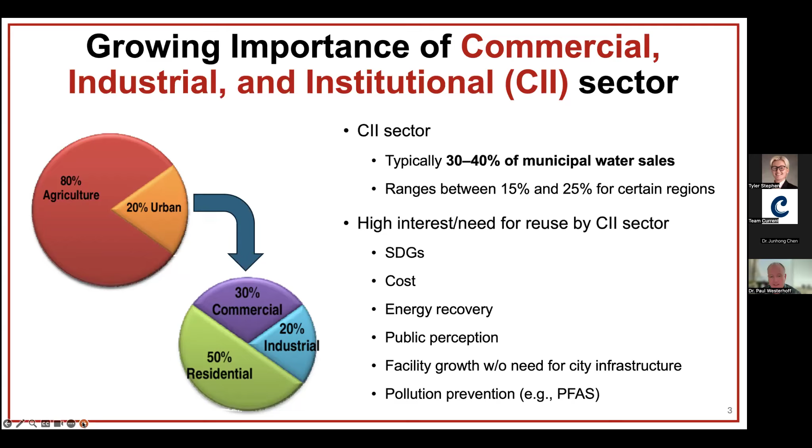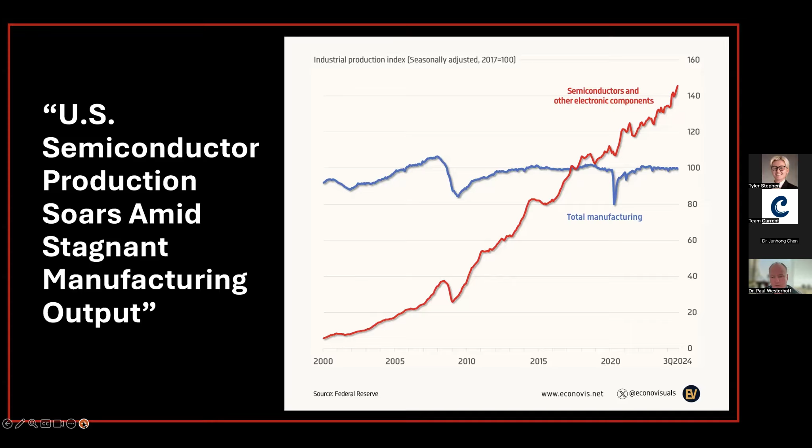Fabs use a lot of water, in part because they need a lot of water to clean the wafers. A typical fab can use tens of thousands of home equivalents. There are lots of small fabs that might use 100,000 gallons a day, but large fabs might use 5 to 10 million gallons of water a day.

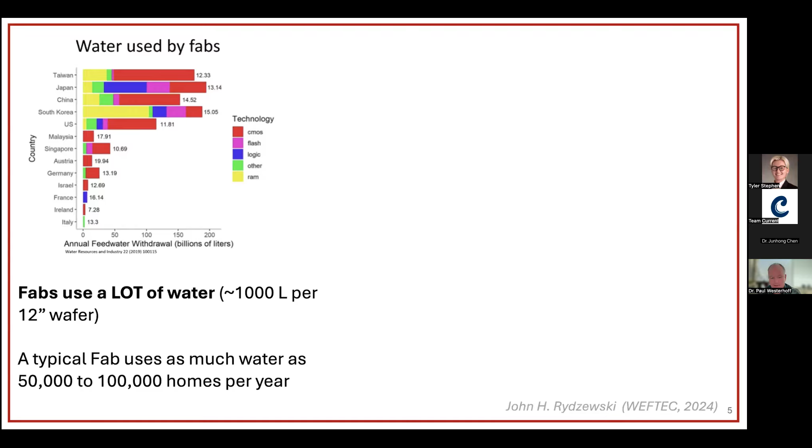Some fabs need dry air, otherwise they have to dehumidify air. There's taxes, energy, power costs, lots of reasons to site them, as well as an ecosystem of companies, because a fab by itself isn't going to work. They need this entire supply chain around them.

So fabs use a lot of water, and there's a new one growing here in Arizona. TSMC moved here a few years ago. They announced $100 billion in additional investments. They have at least one fab already operational, building 2 and 3, with plans to build many more. Around them then builds this ecosystem of supply chain - they need to build and buy silicon wafers, make the chips, and then package these chips onto the wafers.

And you can see they picked part of Arizona, North Phoenix, that has a lot of desert around it, a lot of growth. There's not a lot of trees, there's not a lot of rivers, right? So as a consequence, you can find newspaper articles about water-guzzling chip makers in Arizona. But even in a place you don't think of as drought-prone, like Taiwan, over the last few years they've had water issues associated with the amount of water that's available.

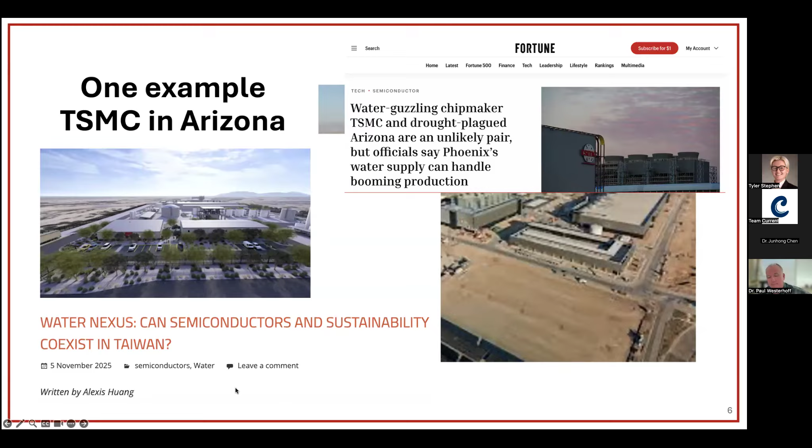So I think this is where we come in and think about how to reclaim and reuse as much of the wastewater in fabs as possible. This is how these high-tech industries of the future are and will grow in areas of water stress. And again, for other reasons, not just thinking about water-stressed areas, but to reduce energy and infrastructure, and to meet their sustainability goals. This is going to be a trend that moves forward, I think, globally.

So hopefully that's a little motivation for why focus on industrial wastewater, why focus on semiconductor manufacturing. Now let's go a little bit more into fabs.

We think about semiconductor fabrication as like making the chip, right? But they make the chip, and then they have to put it on silicon wafers. All those things come from upstream impacts of mining and refining that use water. I'm going to talk about this manufacturing and packaging part. But of course, the chips are used in places like data centers that make us happy with ChatGPT and other things, but these data centers also use water downstream. So I'm really focusing in on this water component in the manufacturing and packaging sectors.

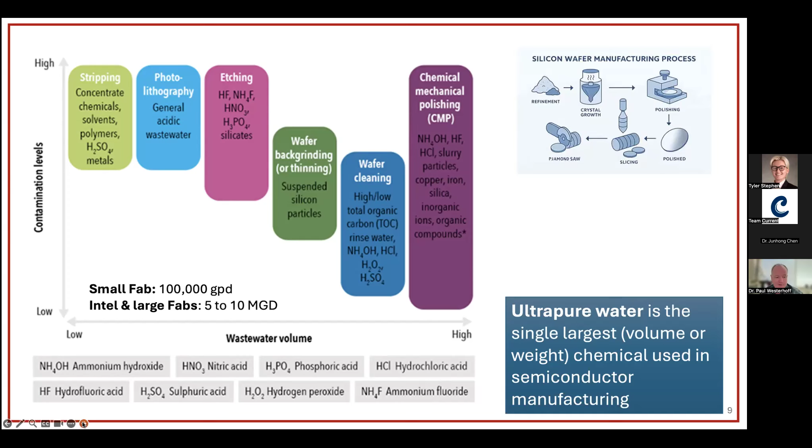But what's missing on this bottom axis is ultra pure water. There's more ultra pure water used, and I like to say it's the single largest volume chemical in manufacturing, especially in semiconductor manufacturing. Instead, on these graphs, all they say is it's only listed in terms of wastewater, right? So I'd argue it's important - it generates a lot of wastewater. The question is, how can we take that wastewater and make it back into clean water to be used in these processes?

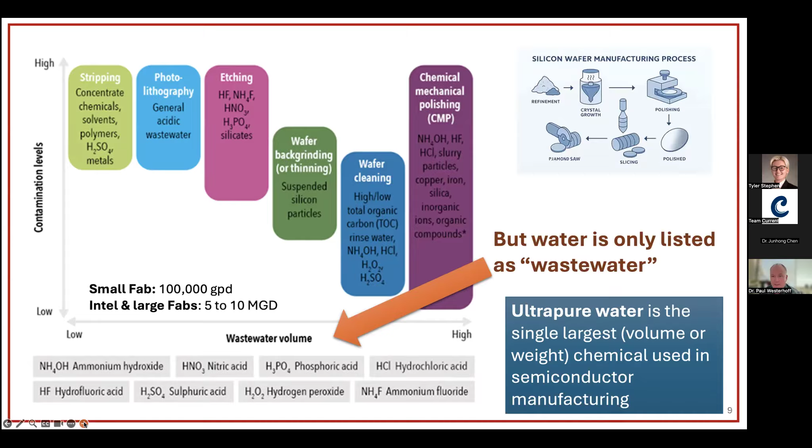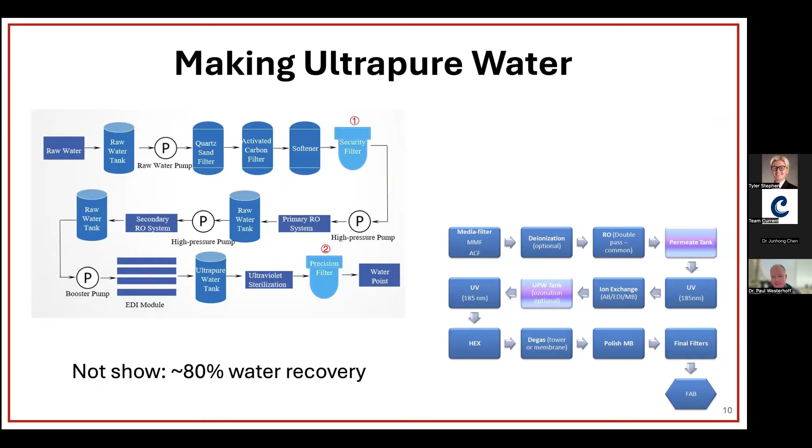So what do they do today? Ultra pure water is made from city tap water for the most part - the raw water is tap water. And you can look at either one of these little flow diagrams. They're pretty similar, I put them both up there because there's some slight differences, but pretty much they remove particles, they remove organics with activated carbon, they soften things, they do reverse osmosis, a second reverse osmosis, then they do electrodeionization, UV sterilization, and more filters.

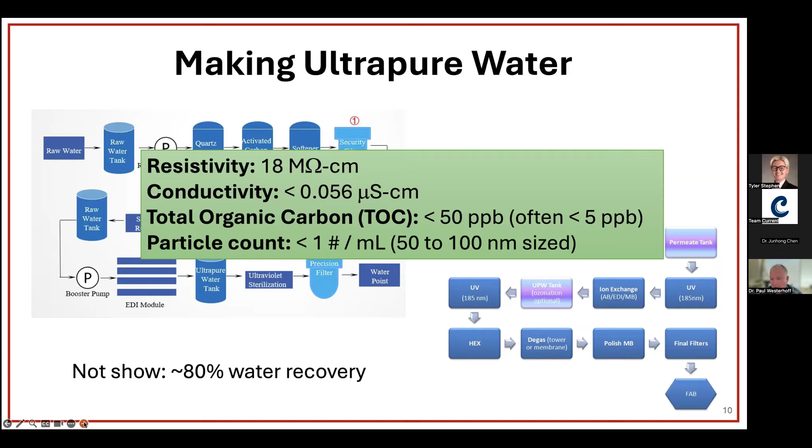And so they really need to make some of the cleanest water on Earth in terms of ionic content. Typically the total organic carbon needs to be below 5 ppb, with incredibly low particle counts - less than 1 per mil in this 50 to 100 nanometer size range. As a consequence of this, the water recovery through this process is at best 80%. So if they can reduce their reliance upon tap water, they can really have an added benefit here in terms of water savings potential.

But there was this incident, pretty well known in the semiconductor industry, from 25 years ago in the Northwest United States. This is published by Intel. It's a sketchy graph, but it's data - on the y-axis is total organic carbon, or urea. So they measured urea here, and again their goal was about 5 ppb.

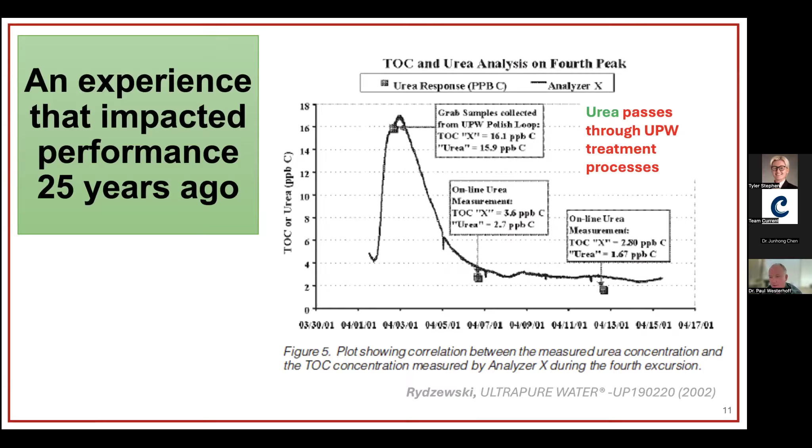But you notice this spike in April of 2001 - it goes up and takes time to come down. That increased spike correlated with urea, and they did a lot of work. It turned out the urea was from a stormwater event and runoff from an agricultural field, where they apply urea as one source of nitrogen. So this has really stuck in their minds - there are a few things that can make it through the ultra pure water system, that's the key takeaway here. And the problem is a little broader than just urea, but really any low molecular weight neutral molecule can pass through ultra pure water systems.

However, they use a lot of those chemicals in making chips—lots of different alcohols, urea, TMAH, DMSO, and a lot of these. So they're really worried about trying to treat wastewater from their fabs and make it back into tap water, because they know that these low molecular weight organics have a high probability of making it through their existing ultra-pure water systems.

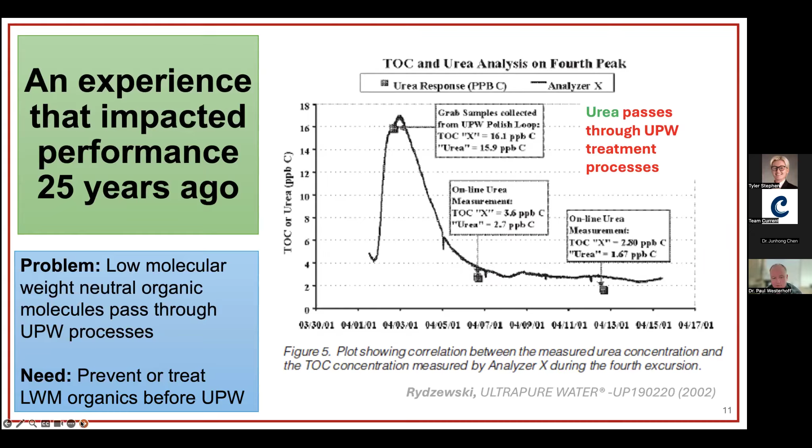So what are the fabs doing in terms of wastewater reuse, even before they think about reuse or treatment? It depends upon their size and their location. On the left, smaller fabs just discharge to a sewer—they might need copper pretreatment, BOD removal, pH neutralization—not too much different than other industrial or CII sectors.

I'll show a little bit more, but if they're going to do on-site treatment and reuse for non-potable applications—not for making chips again—it usually involves a peroxide quench. They use lots of hydrogen peroxide and organic peroxides, membrane bioreactors for COD and ammonia removal, softening, RO treatment, where the concentrate then goes to ion exchange, high pressure RO, zero liquid discharge, and the permeate for non-potable reuse. I'll talk about that in a moment.

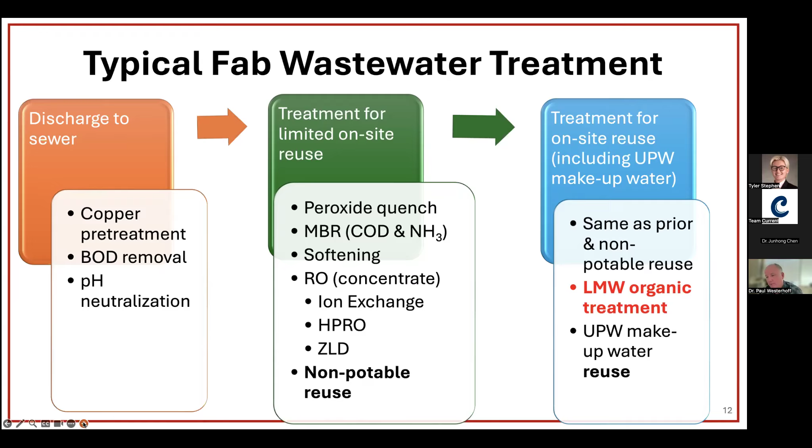I think what we're trying to do is go to this next thing, where you do that, and then also put in another treatment for these low molecular weight organics to supplement their tap water, where the water would still go through maybe an ultra-pure water processing step.

So this would be a typical series of steps used at a lot of large fabs in the United States already. It produces biological waste that goes to a landfill, and in the end, crystallization also goes to a landfill. Intel here in Arizona has two crystallizers, an electric one and a gas one, and they bring off 5 to 10 truckloads of salt to a landfill every day.

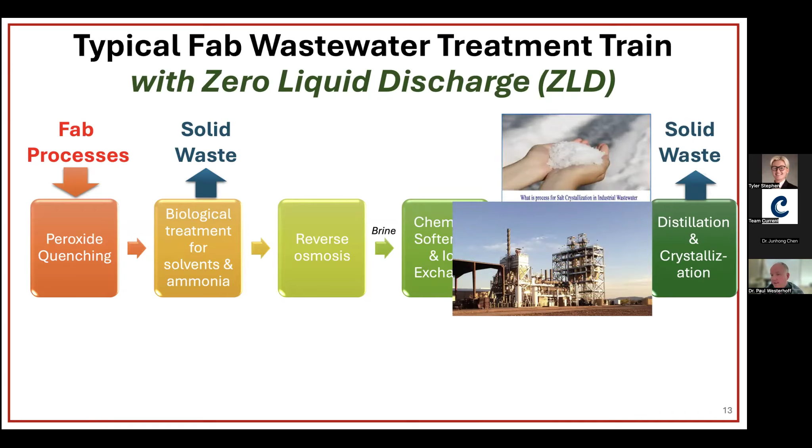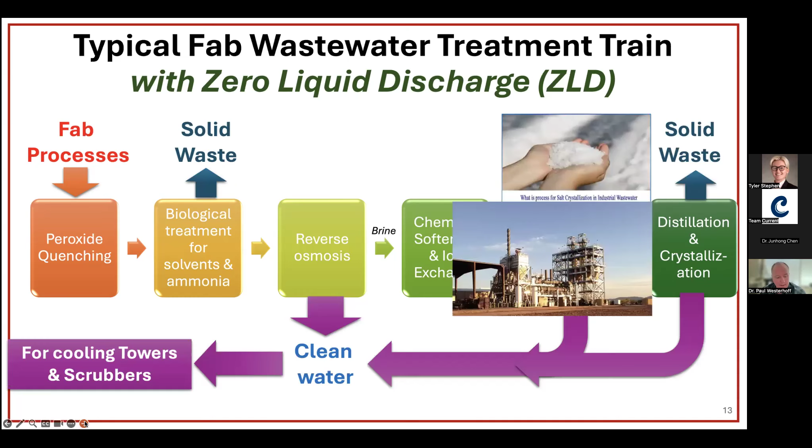But the permeate here and the distillates are considered clean water that's used on site for cooling towers, gas scrubbers, and other applications. That's this first level of reuse—reusing that water for cooling towers and scrubbers. It varies throughout the year, but maybe about 25% of the total wastewater produced can be used in these on-site things.

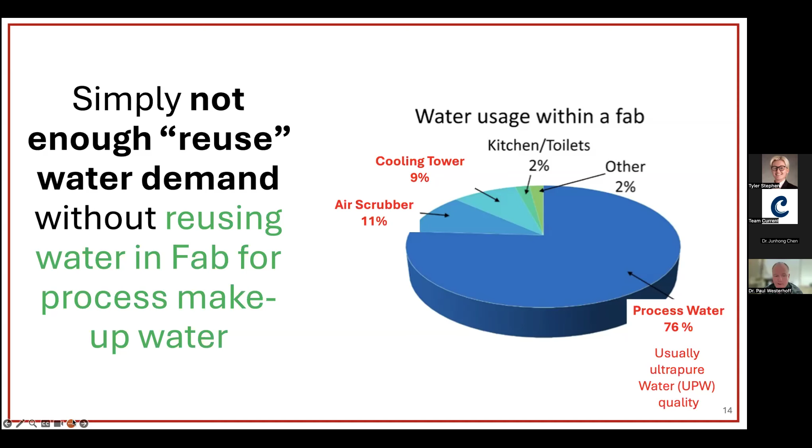So most of the water demand is process water, and they don't currently use that for reuse applications. The idea is to increase this pie where we can reuse water on site—so really what we're trying to do is have cooling towers continue those uses, but then use the ultra-pure makeup water from this process instead of tap water.

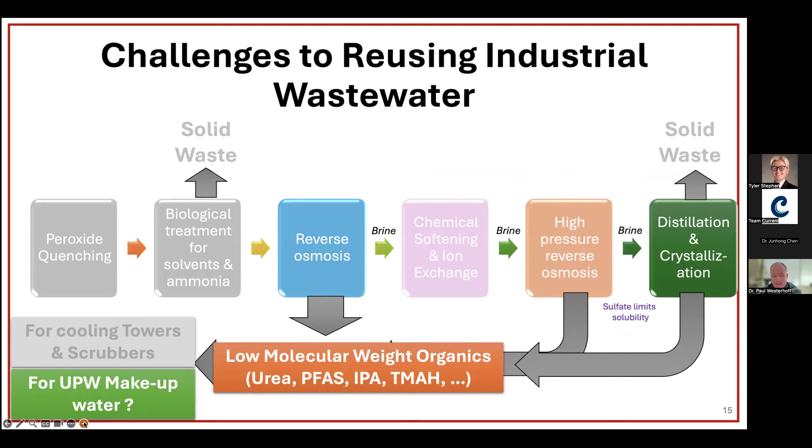And the question is, what about these things in there? How do we treat them to create this new barrier? So now, hopefully that's a good background on why we're interested in these low molecular weight organics—they will make it through a lot of existing reuse systems and through ultra-pure water systems. So who are the actors we're talking about?

These are very good, representative compounds that actually occur in fab wastewaters that they use. They make it through membrane bioreactors. They're small—their molecular weights are all under 100 grams per mole—so they have pretty high diffusivity rates through things like RO membranes. They're not acids, or except for TMAH, maybe not bases, so they don't have any high selectivity necessarily through reverse osmosis, other than their diffusivity rates.

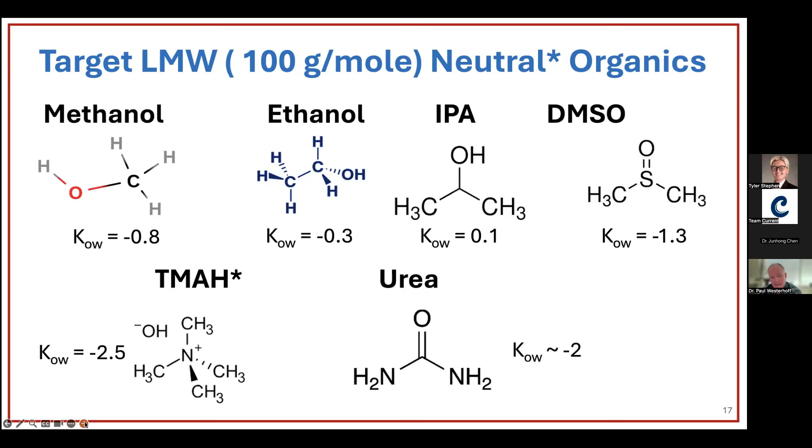And in terms of adsorption, their octanol-water partition coefficients are incredibly low, so they make it through—things like activated carbon wouldn't do much to these. You see some similar characteristics among them; there's not a lot of electron-rich bonds. As a consequence of their structure, adsorption and aeration aren't very good options.

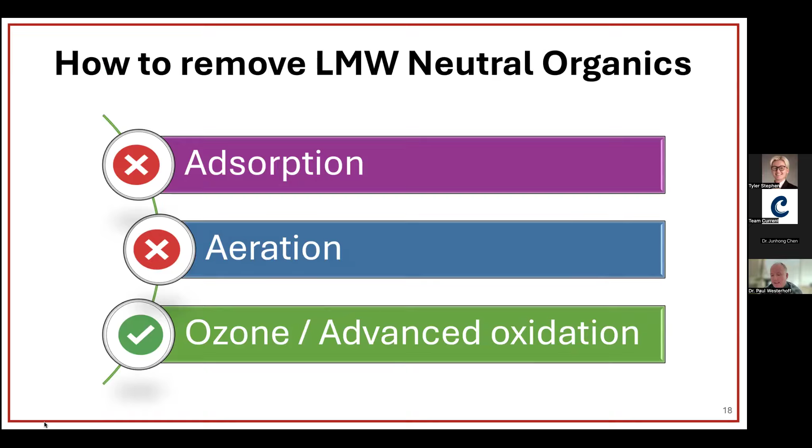So the focus, or the part of the toolbox that's maybe left if you don't modify your membranes, might be oxidation processes. And so which of those chemicals do you target? This graph on the right shows 5 of these low molecular weight organics. The y-axis here is percent removal, and the orange bars are through reverse osmosis.

So urea, you get 30% rejection compared to isopropyl alcohol, where you get over 90% rejection. You can see the other orange bars, and then the green bars are based on the rate constants, a few assumptions, but the ability to degrade them using typical advanced oxidation processes like hydrogen peroxide and UV.

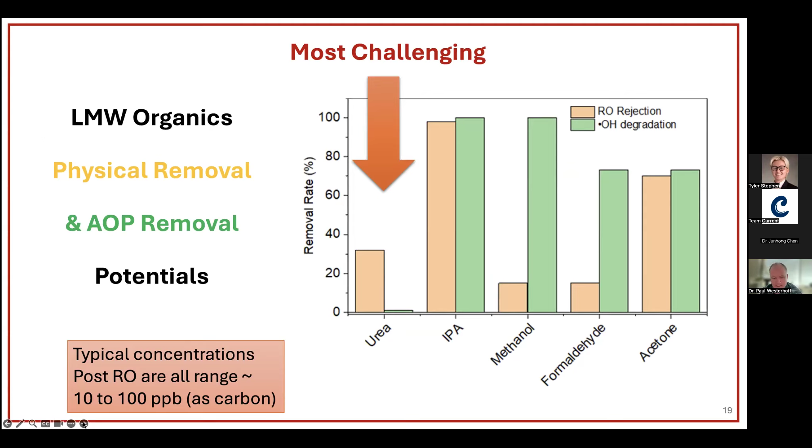So we looked, sorry, maybe I'll just reiterate. So initially we decided to focus on urea, that is, it occurs, it's the compound that would have the known risk of getting through ultrapure water. In ultrapure water systems they do use vacuum UV and ozone, so they do generate hydroxyl radicals, but again, it can get through those systems. So for that reason, initially we focused on removing urea. Now there's some fabs around the world that have noticed this, and they haven't completely moved to reuse their wastewater yet.

But one of the processes that they currently use is on RO permeate, they add sodium bromide and chlorine. And that produces hypobromous acid or hypobromite ion, which with long contact times of hours to tens of hours can degrade urea. So the way those processes work is if you enter a chain decomposition around urea degradation, where you produce ammonia. The ammonia helps regenerate this process.

And here we focused on ozone because you can end up using the ammonia to regenerate and drive this process, which happens a little bit slower if you use just chlorine. So here we focused on using, and the experiment here is a batch experiment where we added different amounts of sodium bromide, with a constant ozonation.

And ozone alone, the gray symbols up top, you saw essentially no removal. But when you add sodium bromide, you form hypobromous acid, you drive this reaction, and you get improved urea removal. Now, there's another data point on here, and we'll talk about this in a little bit.

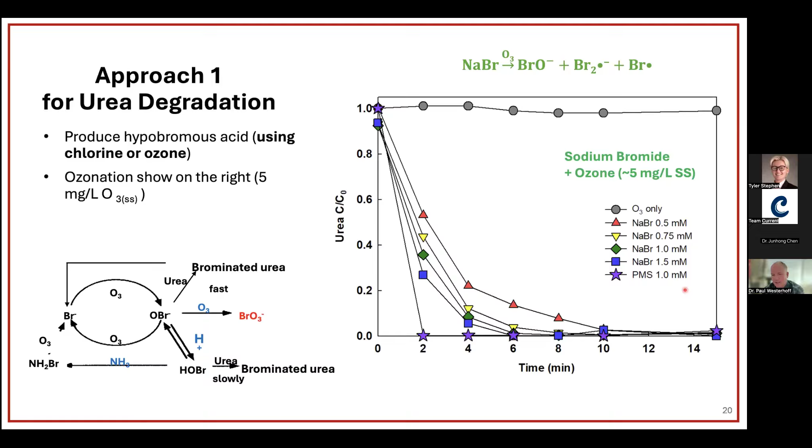So if we are concerned about any of the other ones, we would need a different oxidation process. So we took this step back. We looked at urea and other representative low molecular weight organics on different rows. We looked at ozone, but we also looked at different radicals. The red values in here are data that us and our partners have filled in.

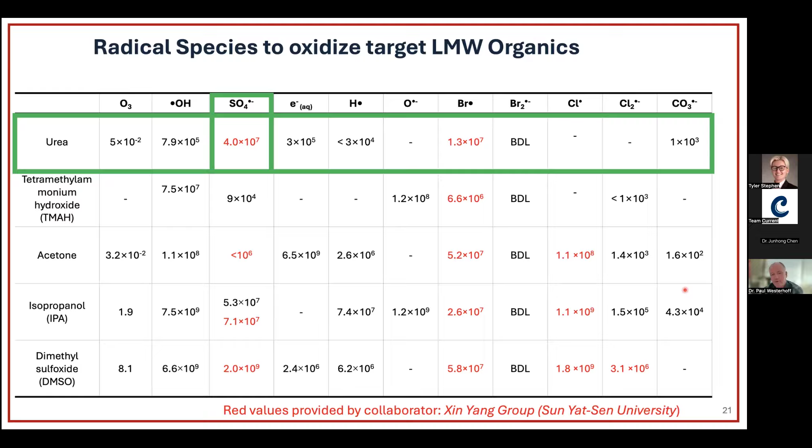But what we notice is that the reaction rate constants, that's what these are, in terms of second order rate constants, are pretty high for sulfate radicals. So that's that green intersecting box there. But it's also fairly high for some of these other low molecular weight organics. So we decided to focus a little bit on looking at these radicals.

I'll talk about ozonation experiments that we did with peroxymonosulfate, or PMS. In the presence of ozone, this generates sulfate radicals and hydroxyl radicals. So the blue line in here is ozonation now with ozone plus PMS, relative to the ozone bromide, ozone alone. And later in the talk, I'll talk about the UV based processes. But for right now, thinking about this blue one.

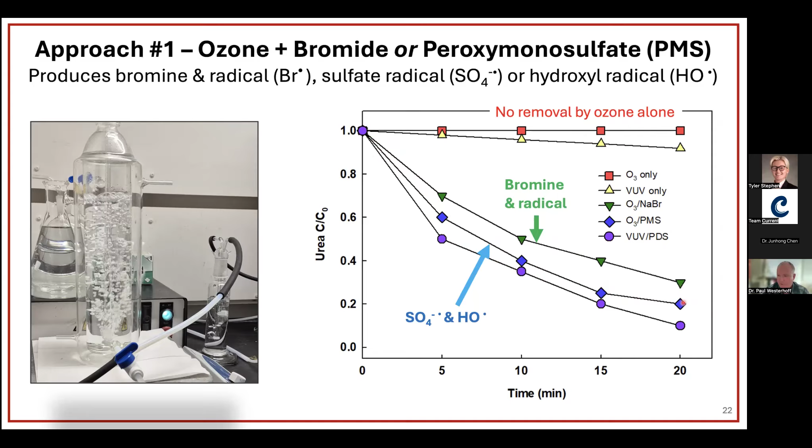So it does degrade urea fairly well at steady state, 5 milligram per liter ozone type concentrations, for reasonable reaction times. So we wanted to look at not just the removal of urea, but also the removal of total organic carbon, or TOC.

On the left here, ozone alone or PMS alone had no change in TOC. Once you had ozone plus PMS, not only did you remove urea, but you mineralized the TOC. That was matched on the right-hand side with the formation of nitrate. Again, these are ppb levels, but nitrate's not a problem.

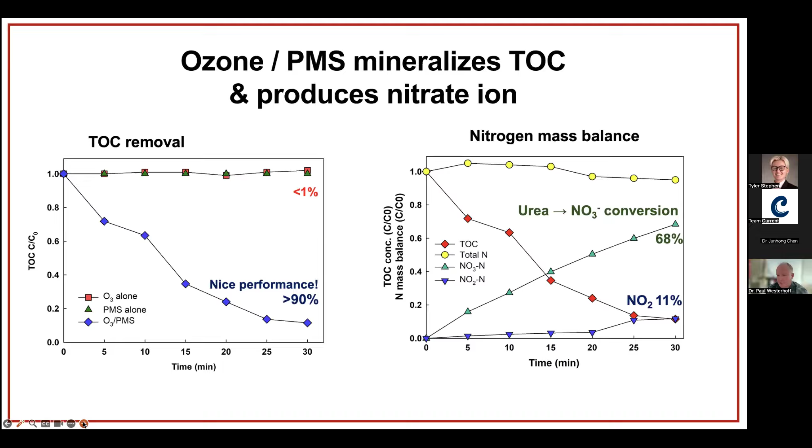Nitrate, or even nitrite, are well removed during a conventional ultrapure water purification system. So ozone works in terms of sulfate radicals and hydroxyl radicals to lead to mineralization and inorganic byproducts. As a confirmation that we had both, because sulfate radicals are good for some compounds, but for others of low molecular weight the hydroxyl radicals are important, in this specific experiment about 2/3 of the urea oxidation occurred via sulfate radicals and about 1/3 by hydroxyl radicals. So they are both there - that was really the key point.

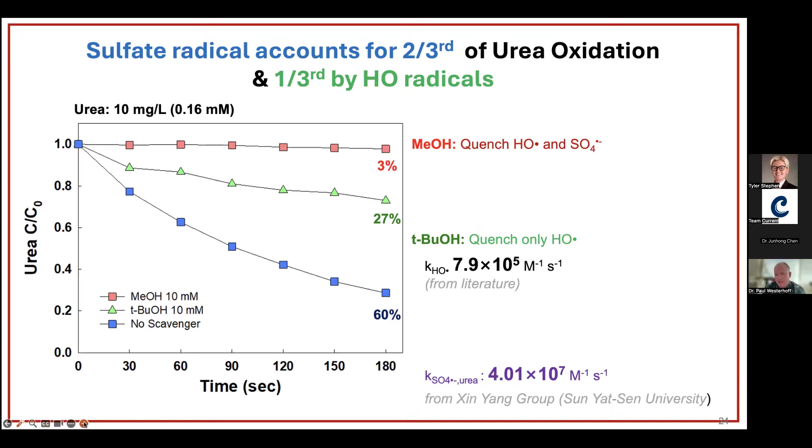So what's going on when you have this PMS is you activate it, you form sulfate radicals, and the key byproduct is sulfate, which is kind of not a problem. But what's very well known about sulfate radical chemistry is chloride is kind of the death of it. And that's really why it's not widely used.

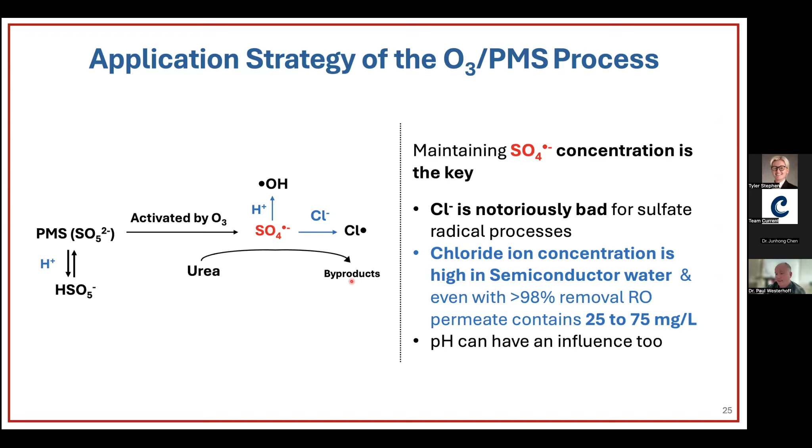But we said, well, this is RO permeate, we shouldn't have much chloride. But it turns out that we do. Industrial semiconductor water uses a lot of HCl and other salts that contain chloride, and the RO permeate can contain 25 to 75 milligrams per liter of chloride ion.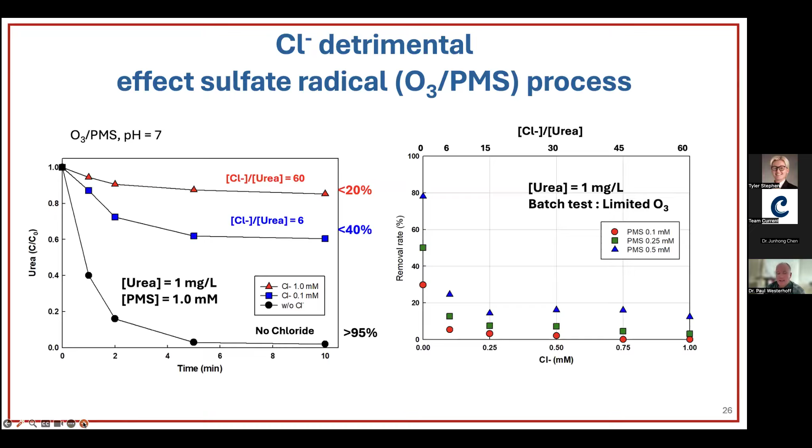So we wanted to understand the effect in this ultrapure water as a function of chloride to urea ratios. Here we're still working at a pretty high urea concentration, 1,000 ppb. The black line is without chloride, and even small amounts of chloride - 35 milligrams per liter chloride is about 1 millimole - will pretty much almost shut down the urea degradation. We've done a number of tests with this, and the way you can overcome it is by understanding the chloride to urea ratio, but you can put in just more PMS.

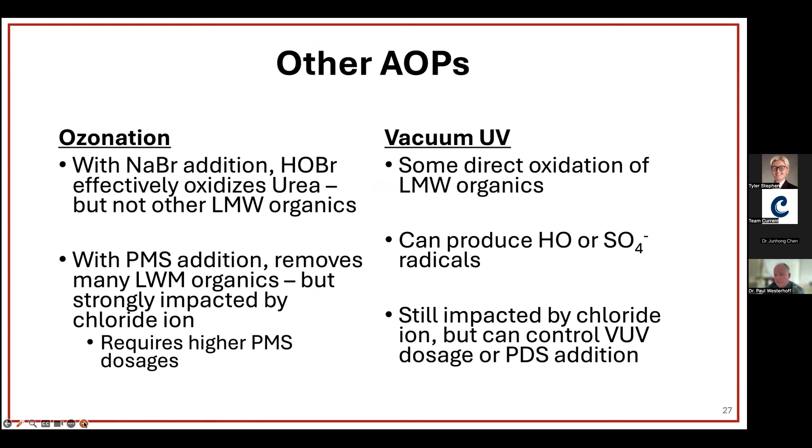You can use more PMS to increase this, but it's going to lead to less and less efficient degradation. So we learned a lot during the ozonation work, and then we wanted to look at other ways to make radicals that might not have all those same challenges. So we looked at vacuum UV based systems - these generate 254 nanometers, but then they also generate shorter wavelengths like 185 nanometer light.

In this experiment I'll show some more that have millijoule doses on them. It's the same graph we looked at before - here was ozone PMS, and the purple line below it was a condition we picked to give similar urea removal. Here we use PDS, or peroxydisulfate, which is slightly more photoactive. That was the initial precursor we used.

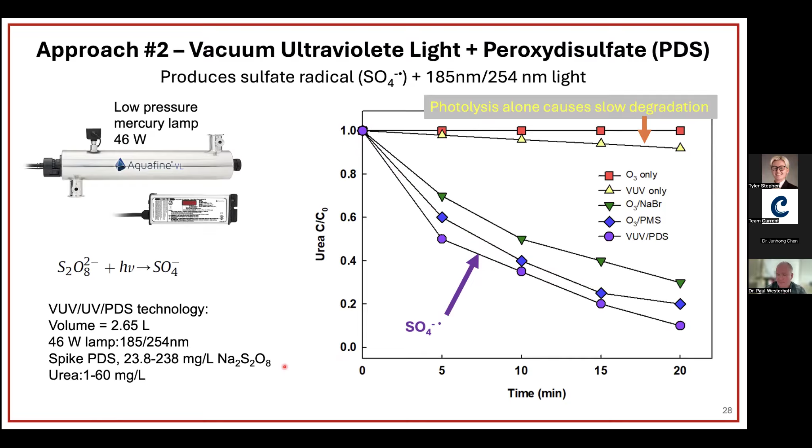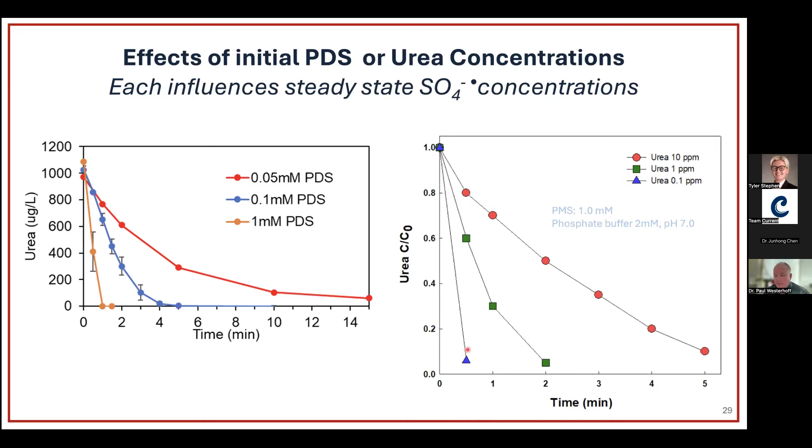So we could vary the PDS concentration - higher concentrations, like 1 millimole PDS, give you very, very rapid urea removal. On the right-hand side you can see the effect of initial urea. The blue line here is most representative of full scale, around 100 ppb of urea, or a little bit less as carbon. So you can get rid of the urea fairly quickly.

And again, we knew that chloride was going to have an effect. So what we're looking at here in the black line is 1,000 ppb of urea with no sodium chloride. In about 1 minute, or about 2,500 millijoules per square centimeter, with a PMS, we degrade the urea and meet our TOC goal.

However, in that system, if you have chloride, you can still get there, but it's going to require 5 to 10 times higher UV dose. You can also add in more of the PMS. But then we looked at a more realistic urea concentration, and maybe you need about 2 to 3 minutes, or about 5 to 6,000 millijoules per square centimeter. So we're efficiently oxidizing urea even at a pretty high concentration of chloride for RO permeate.

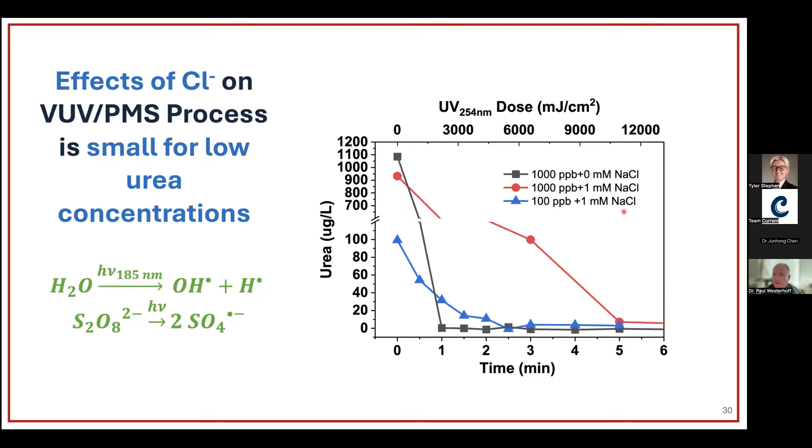So we think this UV system works, and we've done a lot more work with different compounds - we've modeled all these systems. This is just experimentally looking at urea degradation, nitrate formation, and we form a little bit of cyanate as an intermediate. But again, these are all at very low ppb levels, and if you continue the reaction, you can degrade that as well.

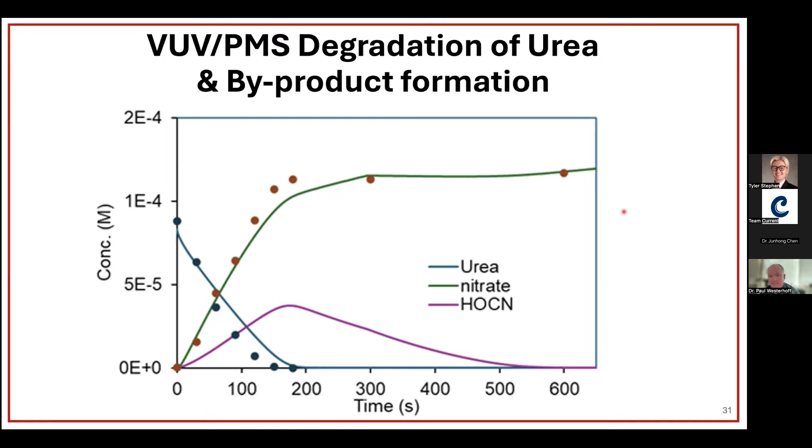So how does this compare to other processes? This example looks at some of the other low molecular weight organics as we zoom back out here, looking at IPA degradation - sulfate radicals in red, more conventional UV, it's vacuum UV still, but with hydrogen peroxide.

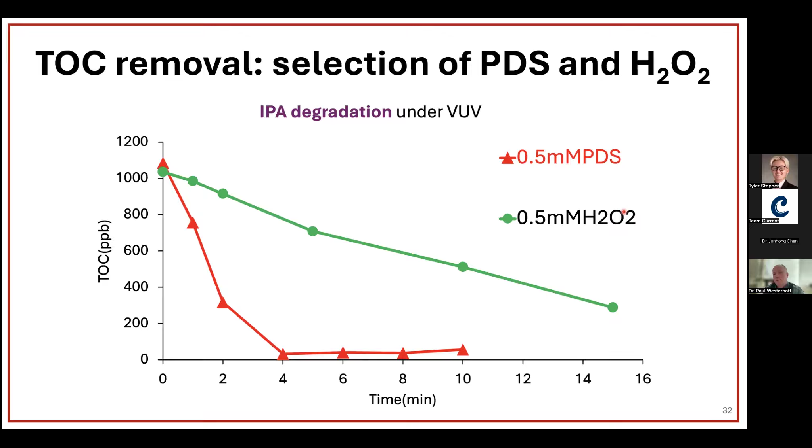It shows that we get better removal of IPA with PDS than we do with hydrogen peroxide. So the approach we're thinking of for urea will also degrade things like IPA. However, in real wastewaters, you don't have only just one of these.

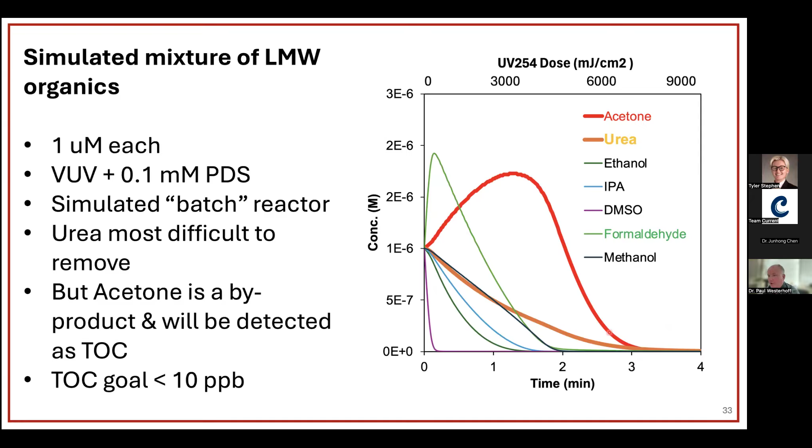So we're going to be using online TOC instruments, but we'd want to be able to track some of these intermediates and products, so we're going to focus on acetone and urea. That's a little bit of a story about two of these different processes.

Again, on the left, we were looking at ozone. UV alone doesn't do anything. If you add ozone with sodium bromide, you can degrade urea. Ozone with PMS, you can degrade urea. Vacuum UV with PDS, you can degrade urea.

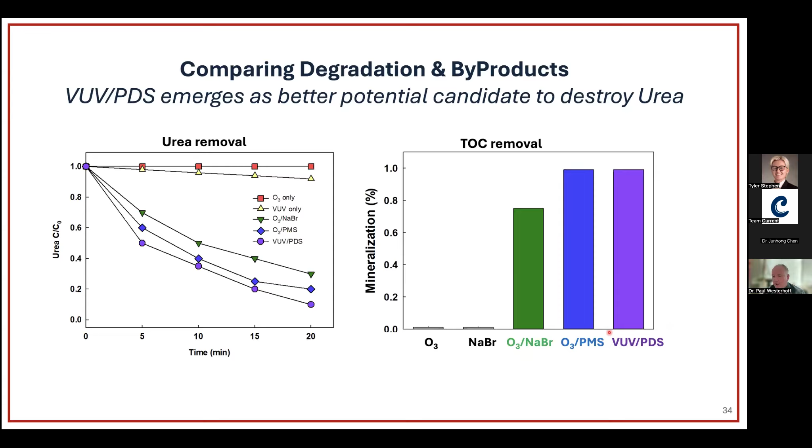And then on the right is looking at not just whether we removed urea, but really the TOC removal. The ozone sodium bromide doesn't work as efficiently in mineralizing everything - you end up with some of these organic bromamine type species in there.

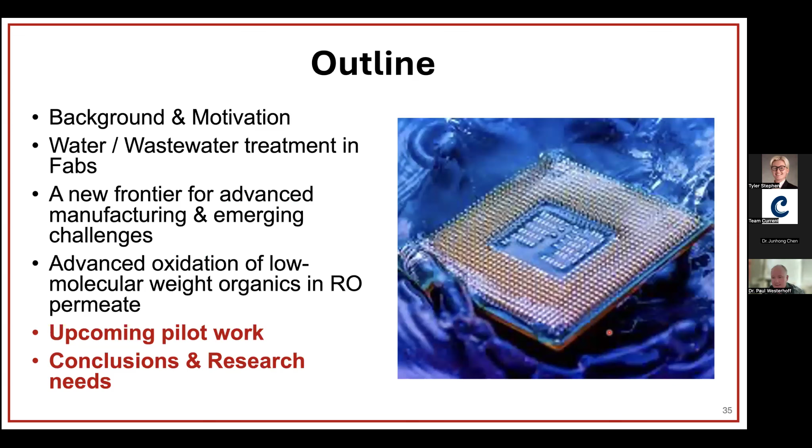So to now come to the closing part of the talk, where are we going next with this? We've done a lot of batch work, and we've dialed in terms of thinking about key doses - combinations of batch and kinetic experiments. We have a really nice model that allows us to do everything.

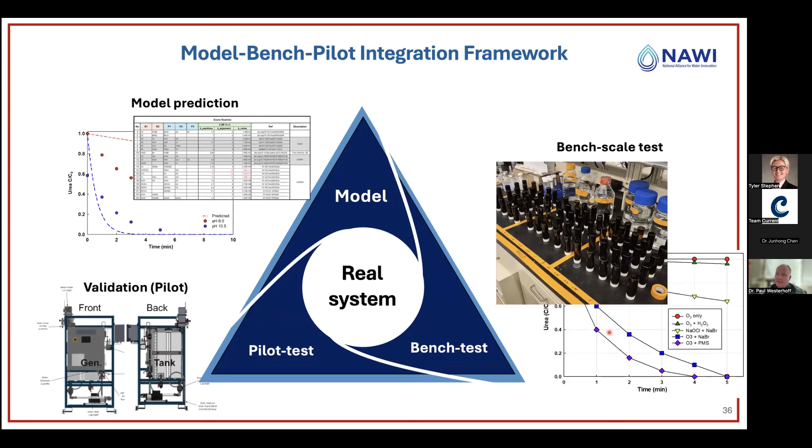So now we're moving towards pilot testing. Our pilot testing is going to be at a full-scale fab starting late spring. This is a partnership through NAWI with Carollo Engineering. We're going to take real fab wastewater, and we have pilots that are being installed.

Our part of this, for the part that I talked about today, is going to be taking the RO permeate and putting it through our trailer that has ozone, vacuum UV, and on the far bottom right, a real ultrapure water system. So we'll be able to follow that all the way through.

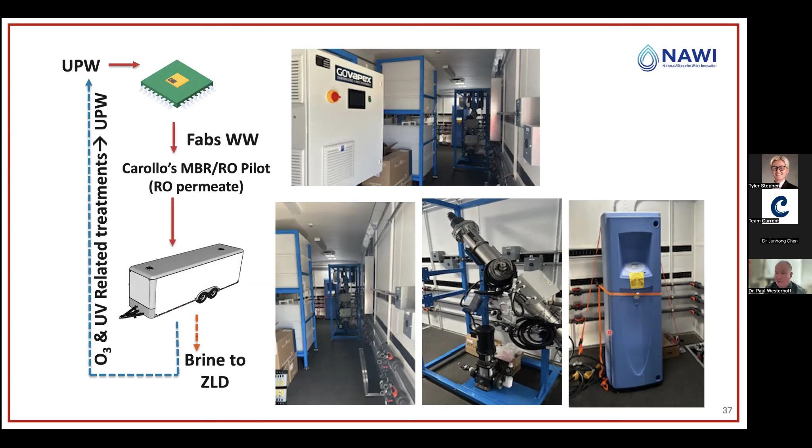Another group here at ASU, led by Tiezheng Tong, is going to focus on the brine aspects of this, which are a different challenge. But here we're going to focus on scaling up ozone, chlorine, and medium pressure and vacuum UV and some other UV technologies. So with that, I'd like to summarize some of the key points.

Advanced manufacturing is expanding, and most of those that need water need very high quality water. I talked about semiconductors, but it's batteries, pharmaceuticals, kind of across the board - these high value companies that we want to see growing in the US are going to need more and more ultrapure water. And there's opportunities to use and reuse their wastewater as makeup water, reducing their reliance on tap water.

We think the biggest challenge of this is these low molecular weight organics that make it through RO on the reuse side as well as through the ultrapure water side. So we need to really develop some high technology readiness barriers that can be used to protect the high quality water. Any of the byproducts from this process, like nitrate, sulfate, are fine, even bromate, as long as we know that they could be removed in a conventional ultrapure water system.

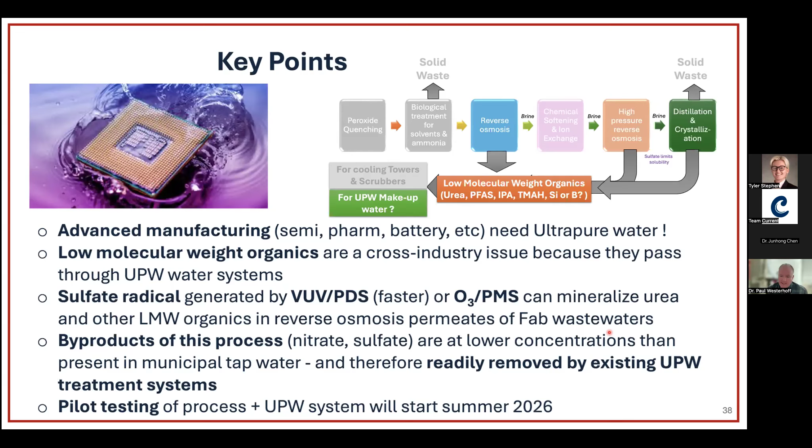And again, our next step is scaling this up in a pilot system.

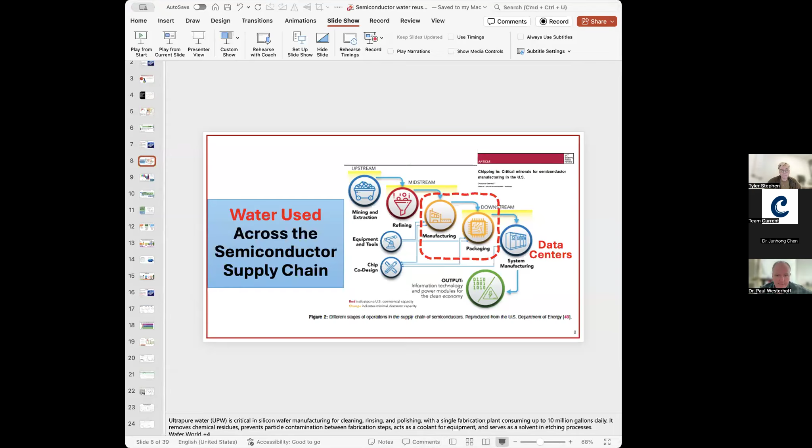Let me go back to that slide, because I thought this one was a really nice one - I gave the citation in the upper right-hand corner from a policy review, that's where this image is from. When you think about the footprint of mining, it's combinations of silica, copper, rare earths that they make into gases. I'm trying to think if I've seen a number for that entire supply chain. We focused on copper because there's copper mining here in Arizona, and the amount of water used for the copper by the time you get to the chip is small for the amount of copper on the chip. So it's the manufacturing and packaging part that is more water intensive. Now, I'm not quite sure, maybe other people know about copper or silica or some of the other things.

But if you consider downstream for data centers, it's really clear that if you think of scope 1, scope 2, scope 3 water - in terms of off-site for energy generation, on-site if you're doing evaporative cooling versus the chips and things - that scope 3 water is really small in terms of the chips relative to scope 2 energy production. And if you're doing evaporative cooling, I think it's like one-third on-site and two-thirds energy production. But normally the chip part is less than about 5% of that whole supply chain for water footprint.

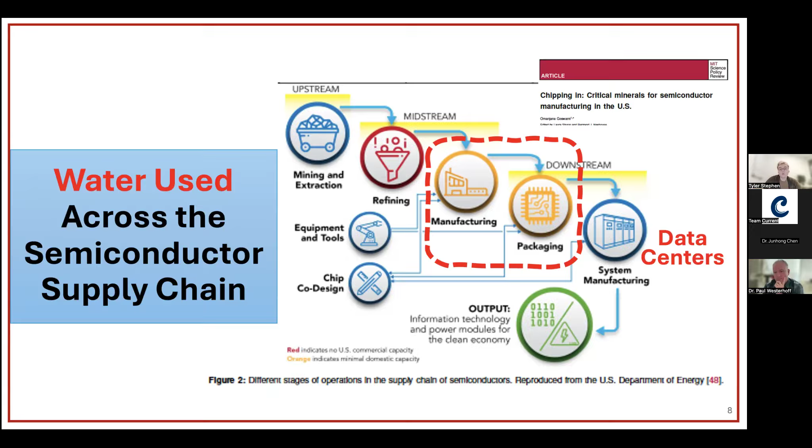Gotcha, great, thank you. And then you mentioned Intel being one of the key manufacturers, especially in Arizona. Can you speak on what their perception of the water challenge is and their receptiveness to this kind of zero water discharge facilities, and from a manufacturer perspective, what their priorities are when it comes to water? Yeah, I mean, I can't speak for Intel, right, but based on my experience and my discussions with Intel.

Intel has two large fabs, in the Northwest and here in Arizona. They both do wastewater reuse. They both have reverse osmosis. They both have the capabilities to do zero liquid discharge. They don't necessarily use that all the time in the Northwest. Here in Arizona, they do zero liquid discharge all the time. They use the water for cooling and evaporative cooling - fabs use a lot of electricity, they generate a lot of heat, they have a lot of clean rooms that need a lot of HVAC cooling, and they use it for scrubbers, in terms of their gas emissions and gas mitigation. So continuous flow, and they'll use some of it sometimes for humidity.

But then they have a partnership with the city of Chandler, so they will reuse the RO treated water within a jointly funded reuse complex. The individual drops of water may go different places, but in the end, anything that's not evaporated is essentially recharged into our regional aquifer - all RO treated before that for sure. So they have no real discharge, they are reusing it entirely. Part of it, the reuse is kind of regional indirect recharge, if that helps.